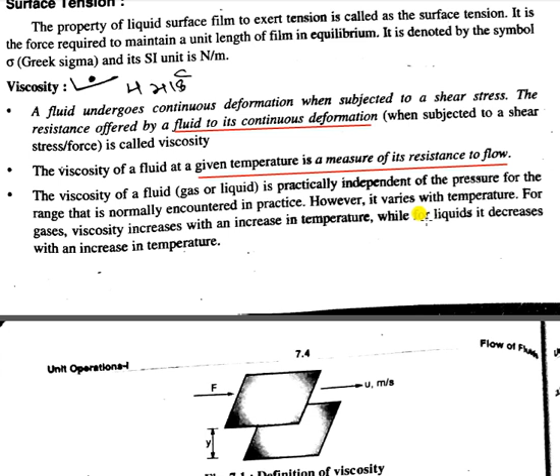So for the gases, viscosity is increased with increased temperature, and for liquids, when we increase the temperature, its viscosity decreases. So let us see a fundamental definition of viscosity. Consider two layers of a fluid y centimeter apart as shown in the figure.

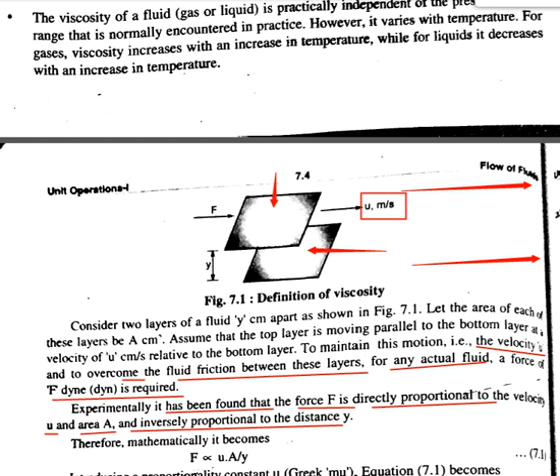Inversely proportional. So the mathematical expression can be written as: force F is proportional to velocity into area divided by distance y. So in this equation number 7.1 proportionality is here. So if we remove the proportionality, some constant is required.

So introducing a proportionality constant mu, that is Greek mu, it becomes F is equal to mu into u into A by y. So F by A is equal to mu into u divided by y. So F by A, what is F by A?

F by A is the stress, okay, shear stress. That means shear stress tau equal to F by A, force upon area. Shear stress is equal to force upon area, so it is force upon area between any two layers of liquid. A fluid may be expressed as, so tau is equal to F by A equal to mu into u by y, okay.

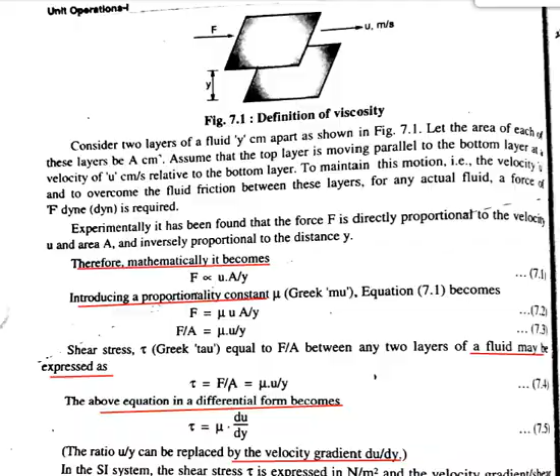In the SI system, okay, the shear stress is expressed in terms of Newton per meter square. And velocity gradient, or shear rate or rate of shear deformation, is expressed in 1 by s, that is 1 upon second, or second inverse. The equation 7.5 is known as Newton's law of viscosity.

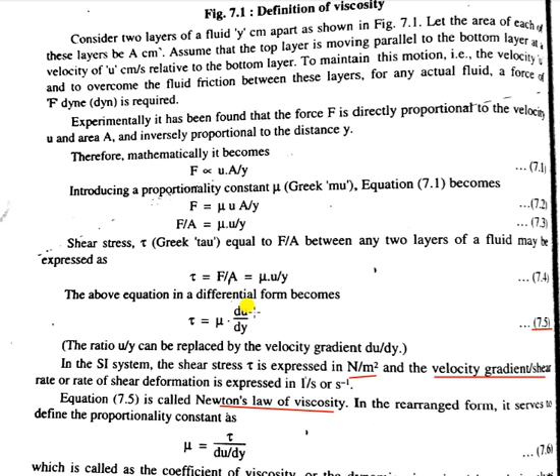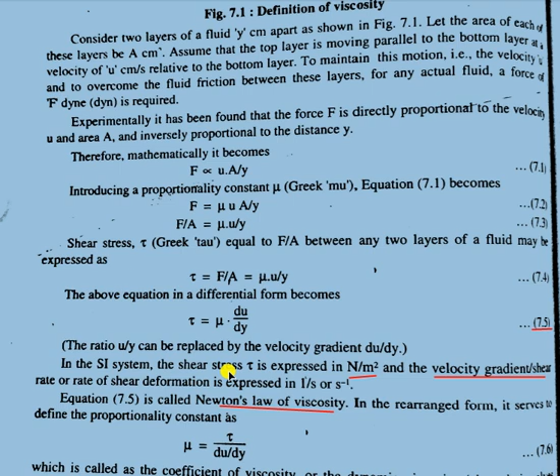So tau is equal to mu du by dy. That is the ratio velocity gradient, that is velocity divided by distance. In a general rearrangement form, it serves to define the proportionality constant as mu is equal to tau upon du by dy.

Mu is equal to tau by du by dy, okay, which is called the coefficient of viscosity or the dynamic viscosity. Okay, so from above equation number 7.5, mu is defined as mu is equal to tau by du by dy. So this equation number 7.6 is known as the coefficient of viscosity or the dynamic viscosity, or simply the viscosity of fluid.

The dynamic viscosity mu may be defined as the shear stress required to produce unit rate of shear deformation, or shear rate. Dynamic viscosity is defined as the shear stress required to produce unit rate of shear rate.

And viscosity is the property of fluid, and in SI system it has the unit of Newton into second per meter square, or Pascal into second, or kg per meter into second.

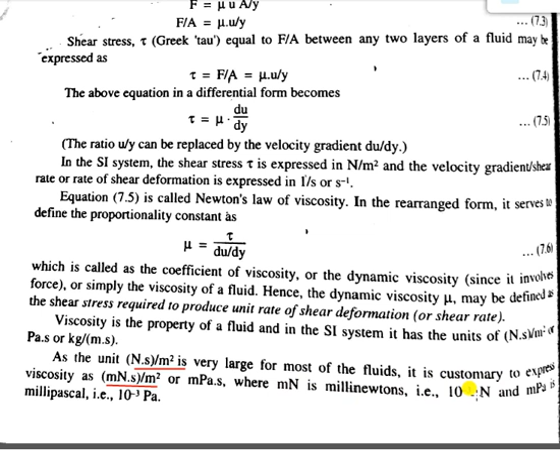Okay, as the unit of Newton second per meter square is very large for most fluids, it is customary to express viscosity as millinewton into second per meter square, that means millipascal into second, where mN is millinewtons, that means 10 raised to minus 3 Newton, and millipascal, in other words 10 raised to minus 3 pascals.

In CGS system, viscosity may be expressed in poise. The unit poise is named after the French scientist Poiseuille. 1 poise is equal to 1 gram per centimeter into second, that is equal to 0.10 kg per meter into second, equal to 0.10 Newton second per meter square or Pascal into second, that is equal to 100 centipoise.

In many problems involving viscosity, there appears a term kinematic viscosity. So this term is also useful. The kinematic viscosity of a fluid is defined as the ratio of viscosity of fluid to its density, and it is denoted by the symbol nu. Nu is mu by density.

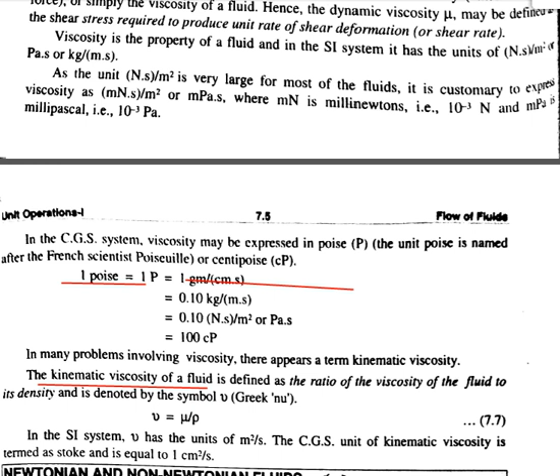Okay, so this is the detailed study of viscosity. Any fluid has some viscosity, and in this topic we discussed what is viscosity, what are the types of viscosity, that means dynamic viscosity and kinematic viscosity, and the units of all these viscosities.